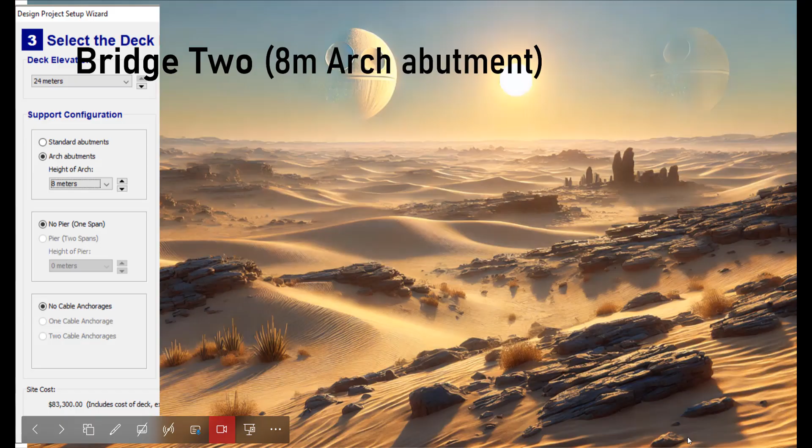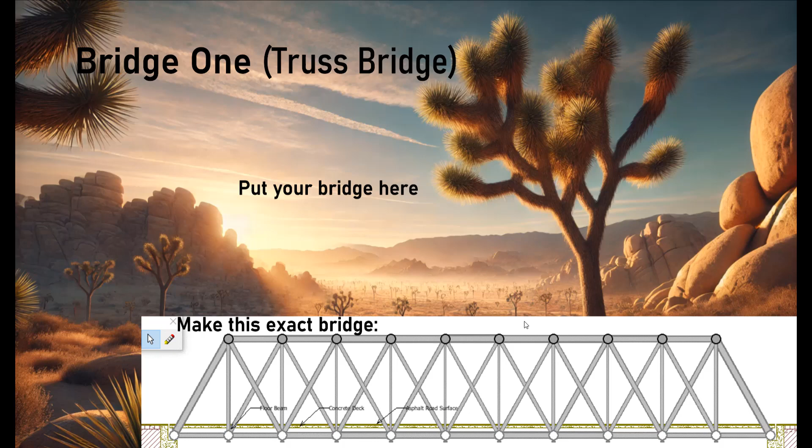Now let's take a look at today's activity. First thing, we always have that writing assignment, please make sure you get that done, do not skip it. Then our assignment is in Teams, called Bridge Assignment 1 through 5, and it's a PowerPoint. You'll notice on the first slide there's a spot for you to put your first truss bridge, the one where you copied what I did and made it as inexpensive as you could.

Right now I have mine down to $273,160.08. Let's test it just to make sure it works, because I know you don't believe me. Now you can see that truck is going to pull up, carefully drive across this bridge, and exit the other side. Of course, if it had more weight in it, maybe it wouldn't, but right now it is fit for purpose. Fit for purpose means the truck can get across this bridge, that it was successful, that it did what it needed to do.

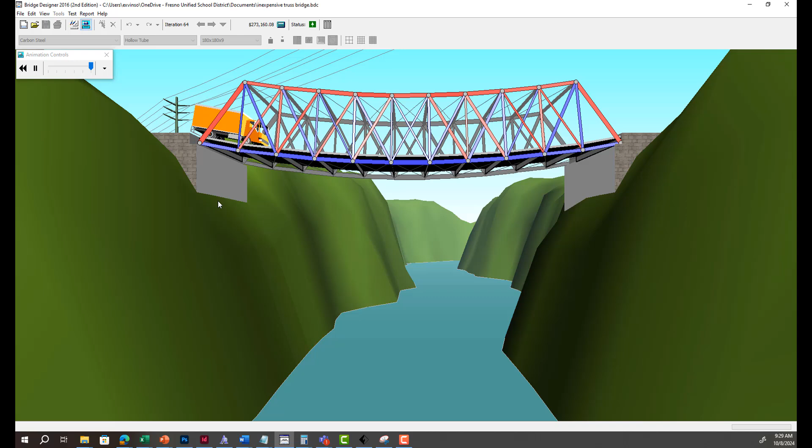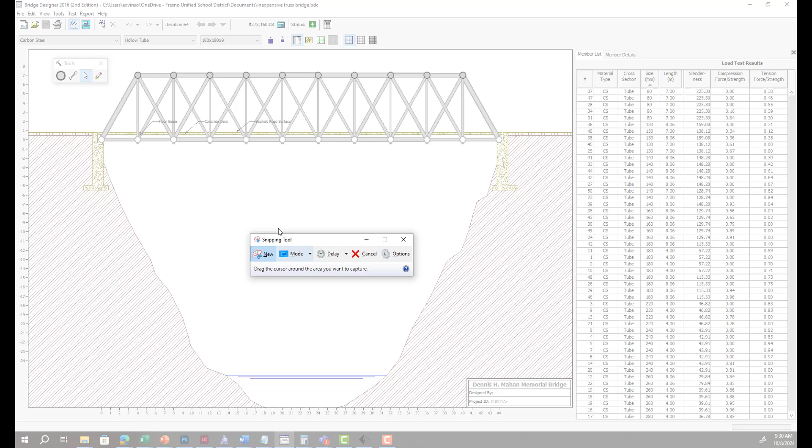So after you have this, you should have a green and white up arrow at the top that says status, and we are going to open up the snipping tool. This is what the snipping tool looks like, it is on your computer. Click that Windows button and then type snip, and you will find it, S-N-I-P. When we take our snip, it is so important that we include the price and that green and white up arrow so that we know it was successful.

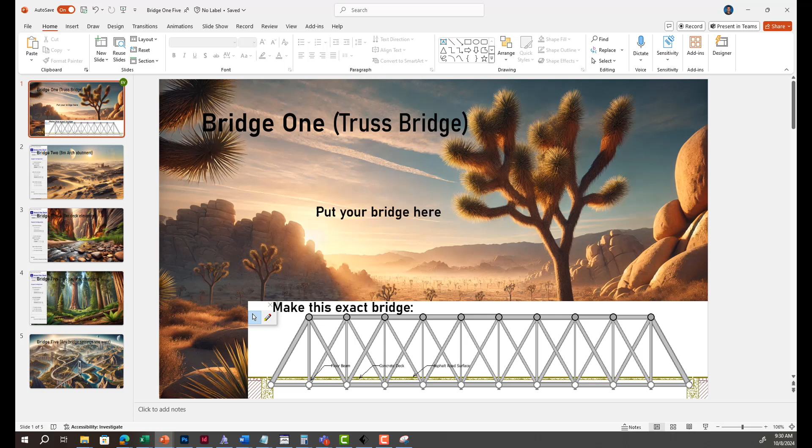I'm going to copy this and head on over to PowerPoint, because inside PowerPoint I'm going to paste, Control V, my bridge into this spot right here. Now that this bridge is there, all is right with the world, and we can start working on bridge number 2.

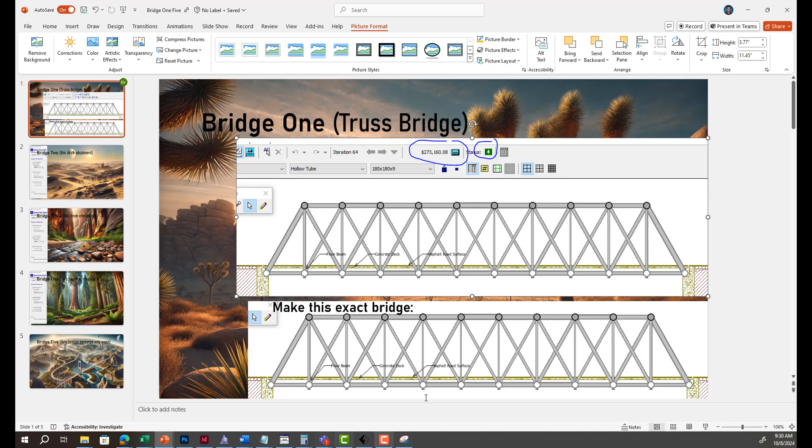This should take you today, and we are going to be making an arch abutment bridge that is fit for purpose, again, an arch abutment bridge that works, that the truck can drive across. You'll see here on the screen that it says support configuration arch abutment, and we have to set that up ourselves.

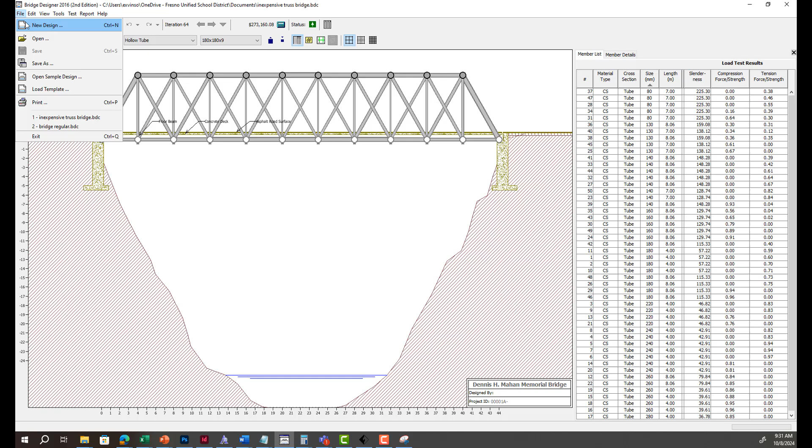So when we go back into the Bridge Designer application, we're going to make a file, new design. We're going to click next 2 times, and change this setting to arch abutments. Once we have arch abutments selected, you may choose any height for the arch that you like, the bigger the number, the higher the arch. You're welcome to try different ones and see what works best. As you increase the height of the arch, you will notice that your actual cost of your bridge goes up.

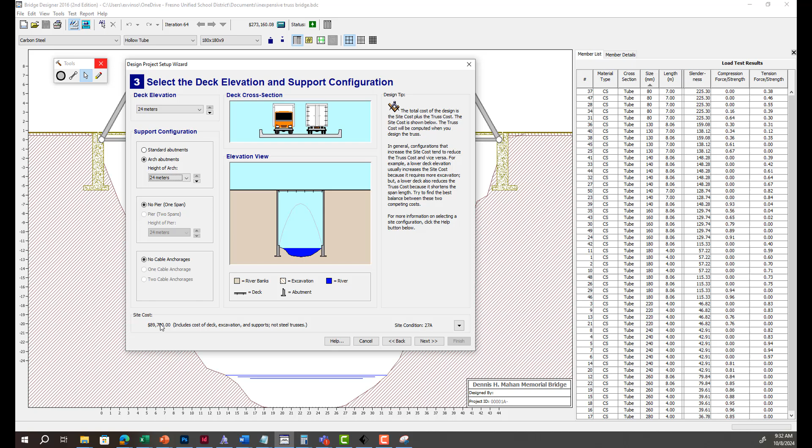So here with a 4-meter abutment, it is an $80,000 setup. With a 24-meter abutment, it is an $89,000 setup. We're going to click next, next, finish, and now we've got our template here with the arch abutment.

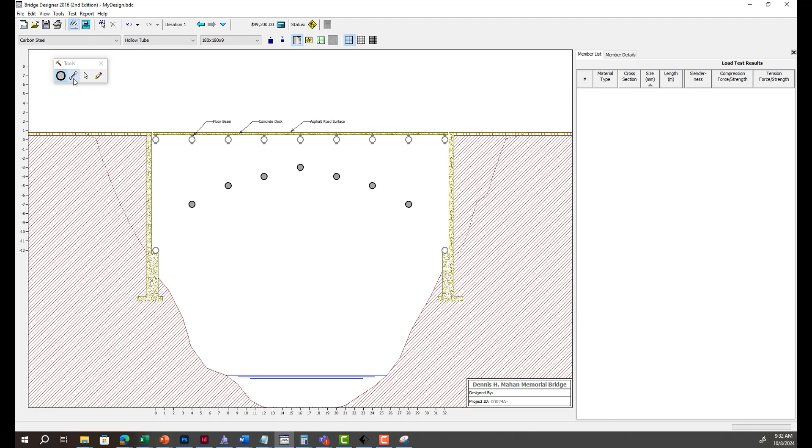Now in this particular case, you do not have to do the bridge exactly the way that I am doing it, you are welcome to do it however you want. But this is how I'm going to set mine up, and I'm going to connect these pieces just like we've done before. I'm going to do that load test.

Watch the truck go across. And just like always, after we're successful, we go back to the drawing board to see which pieces we can change to save money. It looks like none of them are really overly exerted at this particular setting, so I can do some substantial cost savings just by changing all of those pieces. But now it fails, and we can kind of see where it fails, it's that outer piece, kind of what I expected.

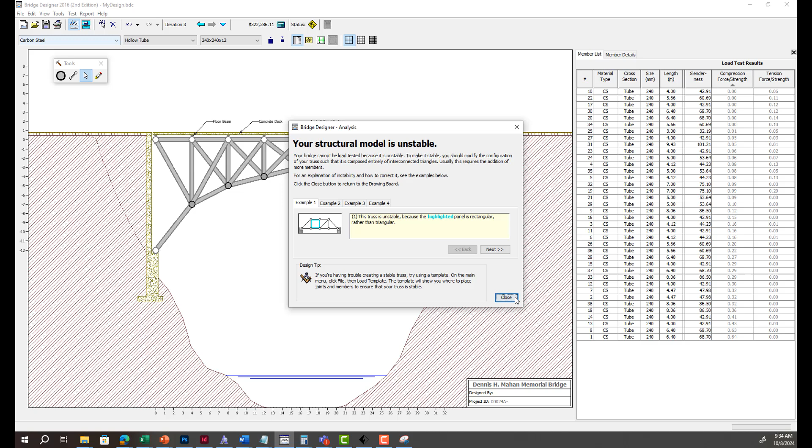We might even be able to just remove these pieces, sometimes getting rid of them is all that we need to do. In this particular case, that's not true, I need to have those pieces in, so I'm going to go put them back.

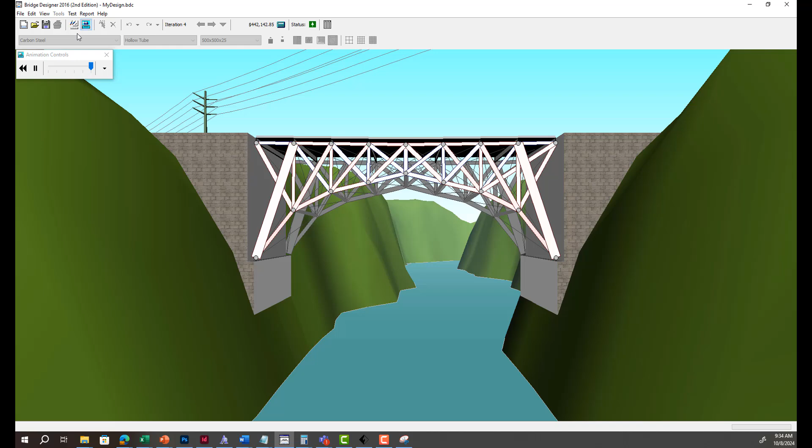Maybe just those two, I'm going to significantly strengthen. So let's see if we take this one and make those big pieces. Let's see if it'll hold, and it will. So you're just going to go through and try to make this bridge as inexpensive as you can.

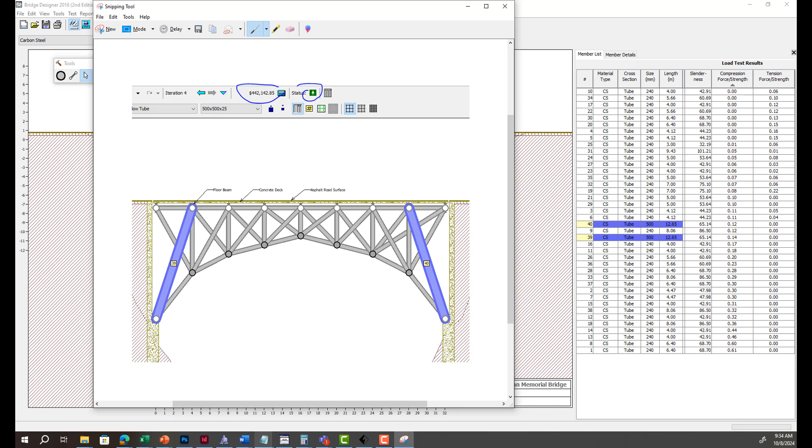Once you have finished that, when you get close to the end of the period, open back up that snipping tool, create a new snip, drag your whole bridge including the price and the status, and put it into your PowerPoint for that bridge assignment 1 through 3. Right here, just paste it in, that's all you need to do. Bridge 1, Bridge 2, done.